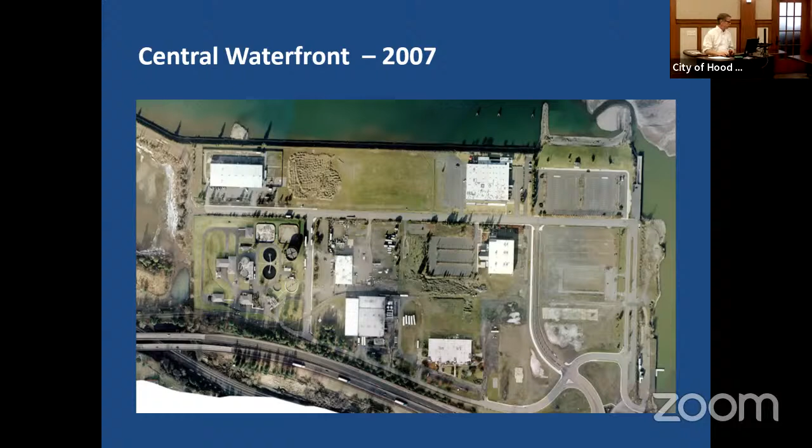This district is actually propped up as one of the most successful in the state of Oregon ever, if you look at the leverage from the amount of investment made to the amount of private capital, private equity that came into the district.

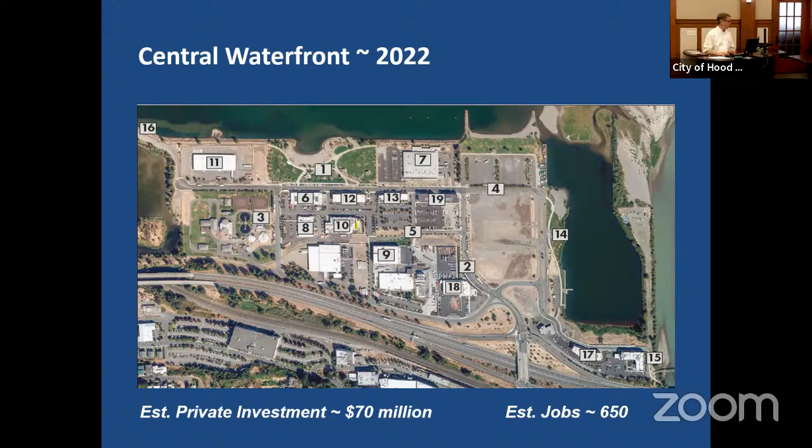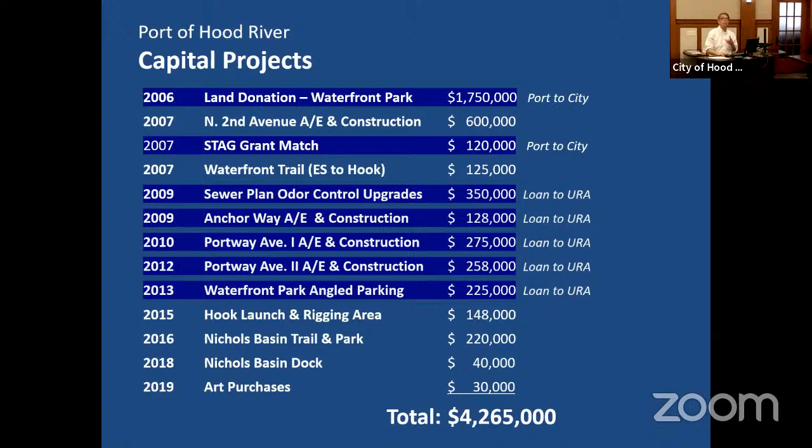It's never had to go to the capital markets. It's always been able to use existing funding and then using the tax increment generated to pay back, in this case, the port. I also included the land donation in 2006, which arguably is a big part of what you see on the waterfront.

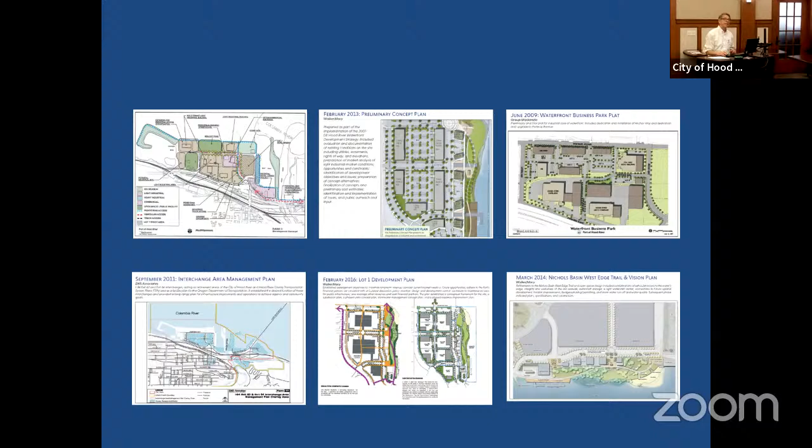There was no, urban renewal did not play a part in this project.

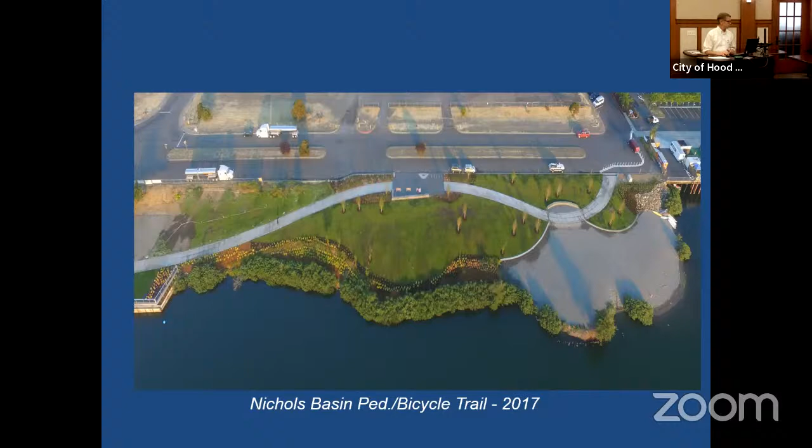And what we were trying to do here was determine more specifically, what's the infrastructure burden there? What needs to be built? Not to determine what ultimately is built there in terms of vertical construction, but in terms of what you would need in basic infrastructure no matter what. And that means streets and sidewalks, streetlights, sewer and water and electrical infrastructure. And again, it could be for anything.

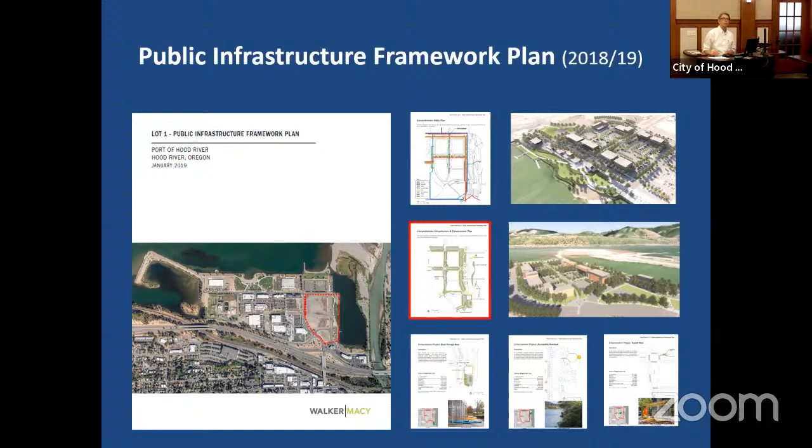So what this plan did was try to identify what those specific projects were, but it broke it up into basic projects and enhancement projects. Basic were those utilities and the basic infrastructure I mentioned.

And importantly, and I'm previewing this, but what you see here is conceptually First Street's moved over, about 80 feet further to the west. And what that does is it opens up another swath of area that at the north end is expansion of the park, and at the south end is an opportunity for some small scale, pedestrian scale sorts of commercial buildings. This concept was reflected in the waterfront refinement plan, which is now in the city's code. So the zoning code reflects this basic concept.

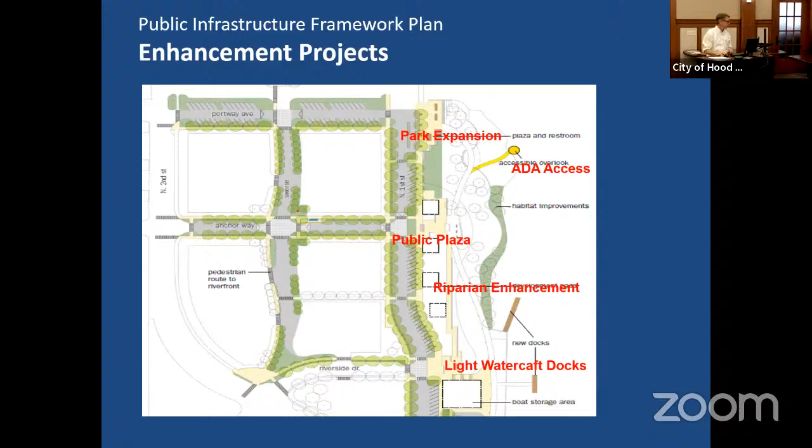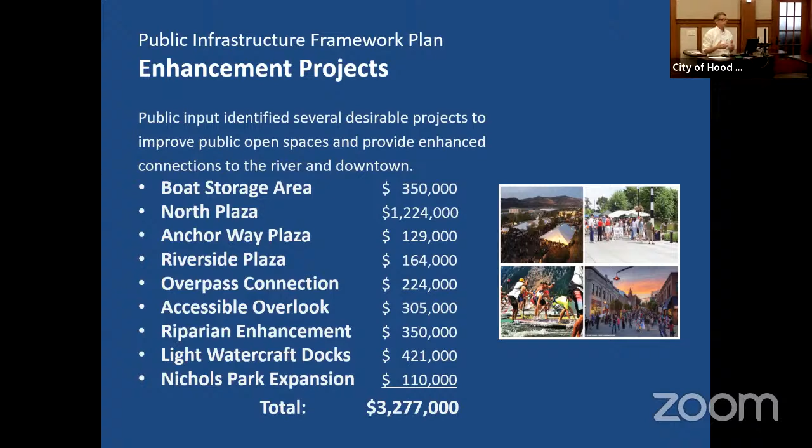So these are the enhancement projects, and this is a list of them. Again, this comes out of the framework plan, and these are based on community input and on opportunities for making that a much richer and a much more enlivened and pedestrian-focused space. So the basic projects are here.

There needs to be a second egress point for vehicular traffic coming out of the waterfront, not now, but in the future, based on traffic projections. So the East Anchor Way is a have to.

Moving First Street over is a really strong want to, because it expands the park space and adds some of those opportunities I mentioned. And then Anchor Way also serves as the potential location for a transit hub.

This is a project that CAT is really focusing on as a way to have a centralized location for transit in this community, and an interconnecting point for the Gorge Express bus and for White Salmon or Mount Adams Express, or Mount Adams Transit, a location where people can arrive and move around the community via transit.

What that does is provide that location for not only the tourist side, but also a location where people that live in other communities but work here have a centralized place to get to, and then get to their place of business.

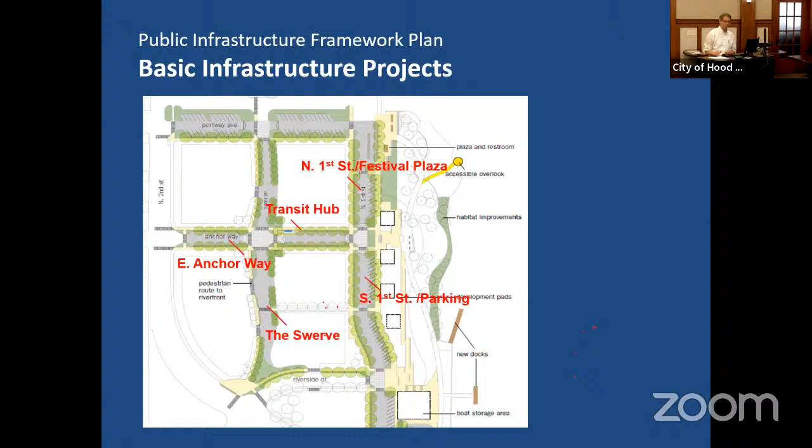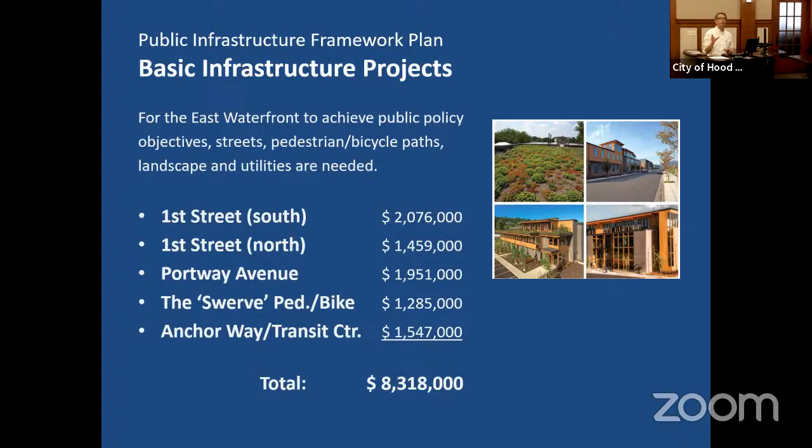So the list of basic projects is pretty short, but you can see some much higher price points. These are cost estimates that came out of the infrastructure framework plan. They had a 30% increase, and we think they're just about where they need to be right now, despite the CPI increases we're seeing. So the total burden there is $8.3 million. These roll up utilities, sewer, water, sidewalk, street trees — all of that is rolled up into these project costs.

The focus right now that we've been on for a few years is what we're calling the multimodal street. That's the East Anchor Way, it's the transit center, the public transit hub. This project, we started conceptual engineering, and then we've completed 15% engineering.

This is just an engineer's plan that shows what it would look like. In the upper right quadrant is the transit center, a pull-off for buses, a simple transit or a bus shelter in the beginning, but room for expansion.

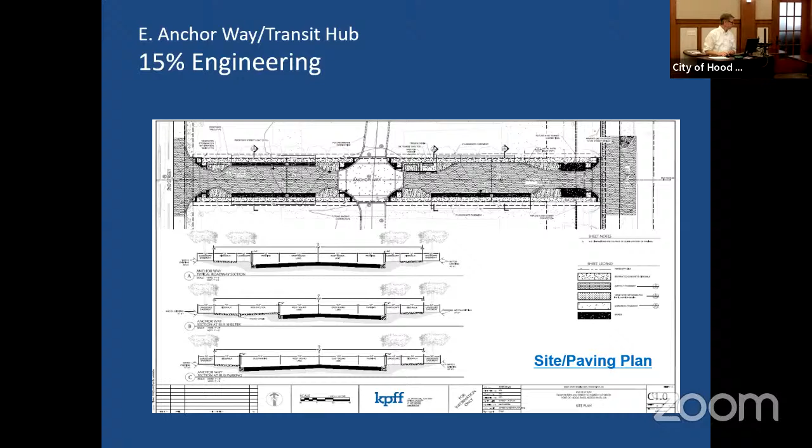You can see in the darker swaths, that's essentially part of the Green Street Network. So it collects stormwater off the street and cleanses it before it goes out into the river. And this is — I'm flipping you around now.

Now you're looking to the west, but this is the same level of engineering drawings for First Street. So we've completed that, we've updated the cost estimates, and this combination of projects, East Anchor Way and First Street, are really the core projects to establish the necessary infrastructure there.

And they can be done individually, but they're most efficiently and cost effectively done together if possible.

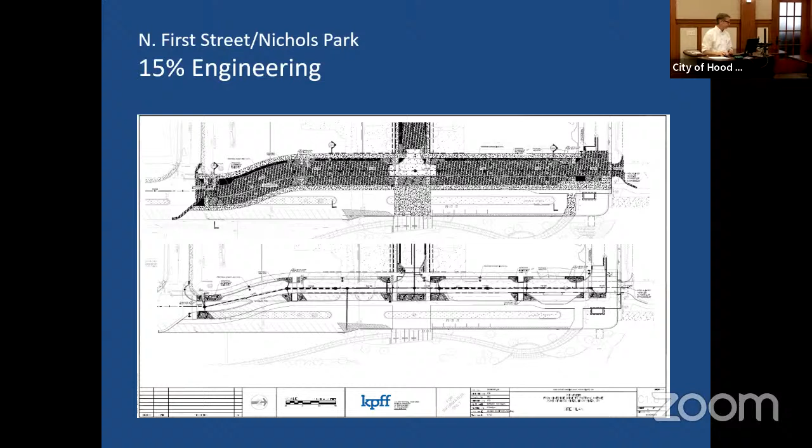So here's the current cost estimates. Anchor Way and the Transit Center is a lower cost project, 1.5 million. We've got engineering and CM on top of that. So when you add it all up, those two projects, the most important ones, are about 5.3 million.

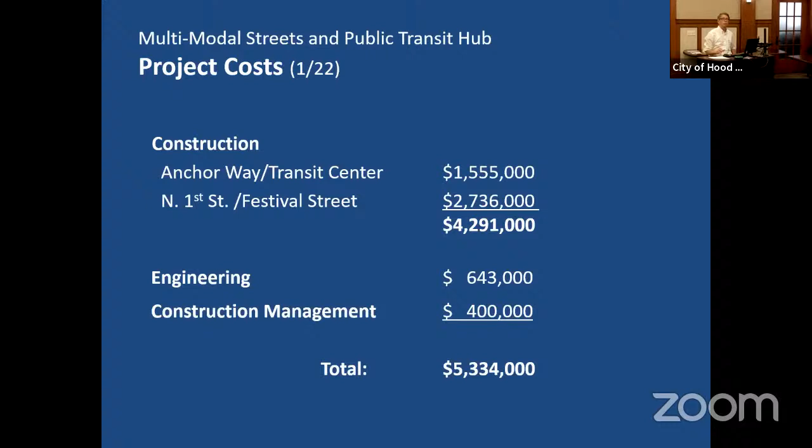Now funding — this shows where we are in the funding stack, although there's an update. So we have 2 grants in hand, $500,000 grants each. And then the port in our current budget is committed to over $1 million contribution.

Under potential, the FHWA grant is still an outstanding possibility. The CDS grant, congressionally directed spending grant, is still outstanding — in other words, we're not sure yet. And the EDA grant, the slide I showed to the Urban Renewal Board had a $1.9 million number there.

It's a very, very competitive process. We received word a week and a half ago that it was not successful, so we did not get that. So we have a delta of about $3 million to do both together, not just to do one.

So how does urban renewal enter in? This is that question about what you see as the future for the waterfront urban renewal district, if any. This is the outline of the current district — it's 109 acres, goes from the hook all the way over to the pedestrian bridge, inclusive of all those properties we've looked at, including the Nichols Basin.

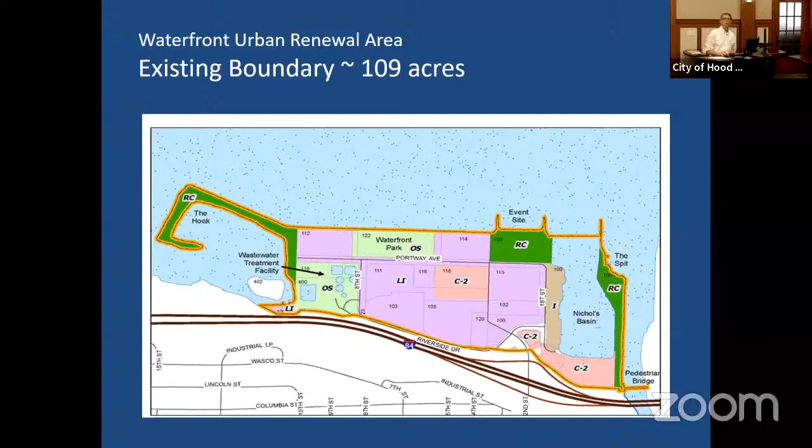I'm not going to go through this much — you've seen these before — but you have the downtown district, the waterfront, and the heights. How would you describe it? The downtown is the grandfather, the waterfront is sort of a teenager, and the heights is just getting going. So you have districts in this community of different age and duration, and different decisions for each one. For the heights, it's got a long run and a lot of important work to do.

But the fourth, additional one is the potential west side urban renewal district, and that's an important factor that the board is certainly considering, as I know you're aware of.

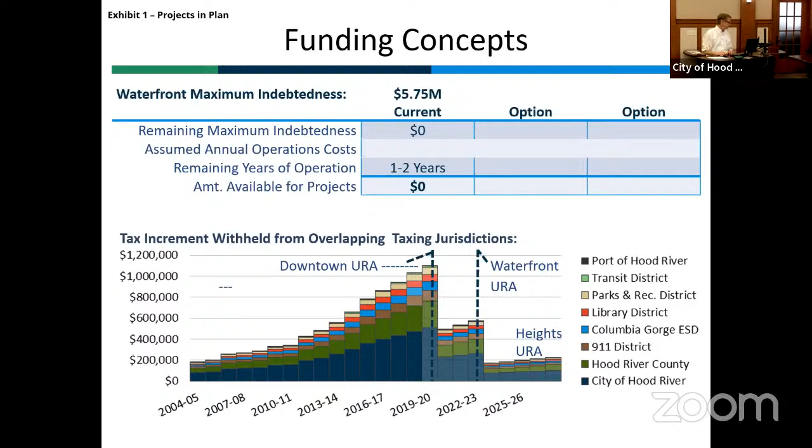So essentially what we worked with Elaine Howard, who's also the consultant for the West Side. She was also part of the team that did the original study and the original urban renewal plan and report for the waterfront, to do just a basic first level assessment. Where are we in the district? And then, conceptually, what are those options?

So here they are laid out. The district, you don't really actively terminate it. You just say there's no more TI, we can't do anything more, and it just basically times out or goes to sleep. What that does is it frees up the whole 109 acres, and that can be deployed on the West Side District or some other use determined by the council and the board.

You also can increase the maximum indebtedness. That's the key number. The MI is basically spoken for. The sewer line, the storm line was the project that the decision had to be made to deploy all the remaining funds for. But based on the existing statute, you can increase the maximum indebtedness by about $1.8 million. You can do that without, it might be a major plan amendment, but if it stays within that cap, it does not require approval by the other taxing jurisdictions. And that's an important distinction.

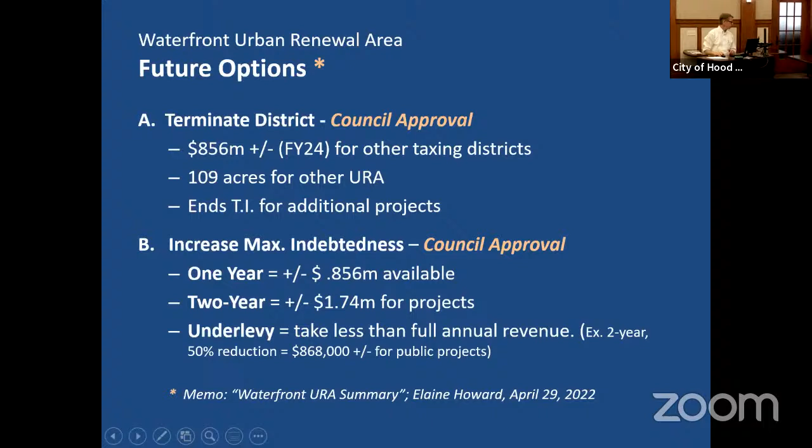But then there's other options too. You can increase the maximum indebtedness above that $1.8 million cap. That would be a major plan amendment, effectively you need to redo many of the steps that were done for the current urban renewal plan and report. But effectively, if you go above 1.8, then you have to go to your other taxing jurisdictions and make sure they're okay with it.

So the big three, of course, are the school district, the county, and the city. There's lots of other special districts like the port that have a small piece of it, but those are the big ones. And then you and the board will also need to consider options that look at reducing the size of the waterfront district.

Effectively the central area is done. There's not a whole lot more that you would need to deploy urban renewal funds or tax increment funds for. But if you look at that east end, as we talked about, there's a lot of vacant area, there's a lot of public policy objectives that could be achieved there.

And so then you get into a number of different scenarios where you could say we could reduce it by a little, we could reduce it by a lot, and all of that connects back to, we'll talk about in a minute, the financial analysis that underpins what each option is.

If you reduce the district, let's take the first option, it's 109, you take it down to 20 acres. You're returning that 89 acres, effectively all of that assessed value is being returned to the other taxing jurisdictions. And that's the way urban renewal should work. There should be a point where you say, we invested some money, a lot of private equity came in, the underlying tax base went up, and then at a certain point, that all goes back to the taxing jurisdiction.

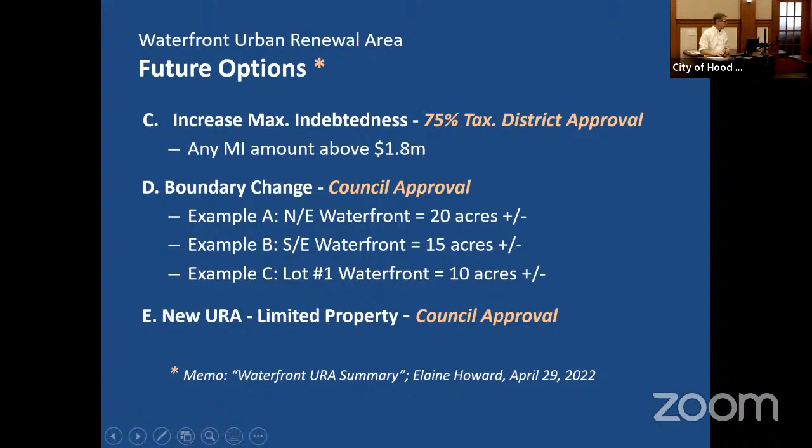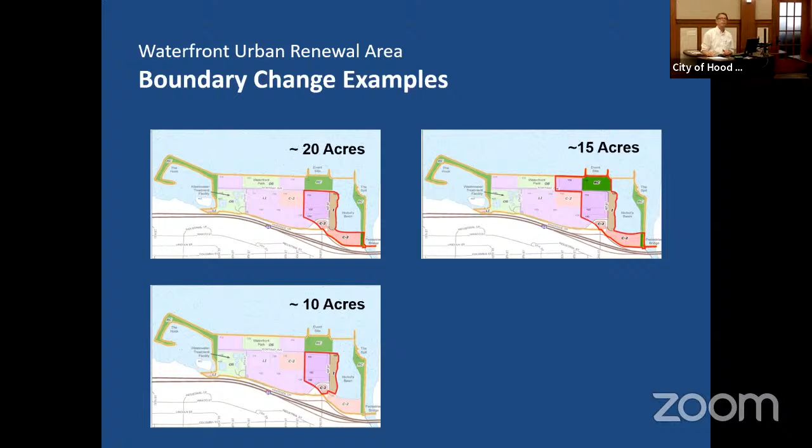So that gets us to, again, you will have your own considerations, and so will the council, but clearly the acreage for the west side is an important factor—trying to make available as much as possible to make that as big as possible. It's a factor that I've heard, of course, that return of the tax base for taxing districts.

And then, of course, importantly—I guess I'm biased—but there are still public policy objectives to be achieved on the waterfront. It's not done. If you look at lot 1 and see that big vacant area, yeah, it's good for snow storage and parking, but there's a whole lot more potential there. Likewise, access to the Nichols Basin, riparian habitat, ADA access, and all of those things. So there's a lot of other objectives that could be achieved.

And I mentioned the interchange access management plan. So this is one that I believe I used as a way to generate the discussion, but the question is, and was posed to the council and the urban renewal board, do you want to undertake further analysis of what these options are?

And what the port has committed to doing is working with the urban renewal board, defining that scope of work and paying for it to take that next step and at least analyze what the options are. So you have a more specific idea of acreage, taxation, increment generation, and what the future would be under different scenarios.

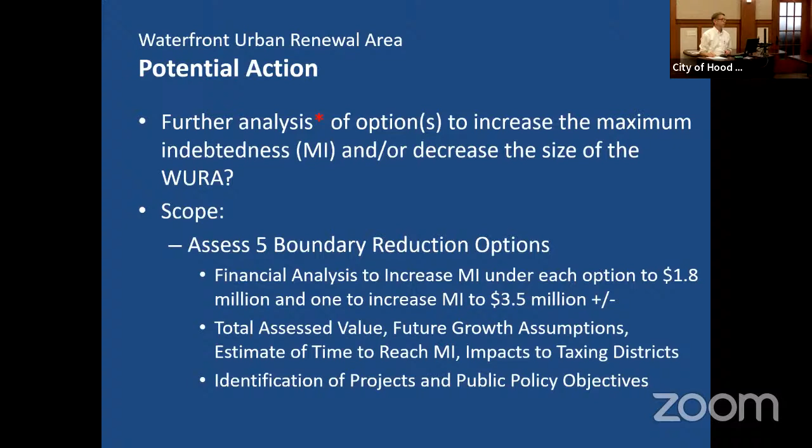I think my last one is that. So what you should have in your packet is not only the report that Elaine generated, which was the basis for much of what we talked about here, but also a scope of work of what she would do, what would be done in that next step analysis.

So I think the question is this—and answer any questions you have. It's fairly simple: 5 boundary options, financial analysis of each. Importantly, there has to be consideration of what are those important remaining projects.

Is it East Anchor Way? Is it First Street? Is it ADA access? Is it park expansion? Is it plazas? And what are the ones that are the highest priority? How much do they cost? In aggregate, how much does that mean as a target?

What other funding is there? Through that methodology, you ultimately arrive at, again, there's scenarios, but here's the role of urban renewal in those future projects. Here are the priority projects. Here's how much it would take. And that drives back through a scenario: how big's the district, how much MI can be generated, how long will it take from that?

So the scope of work was in your packet. I'm happy to answer any questions you have. This would be an iterative process. There's no cost to the urban renewal board or the agency, but it would, and at least I would suggest that it's something that would be valuable for you and the board to consider as a basis for making a decision. Let the district end, or let's go with another option.

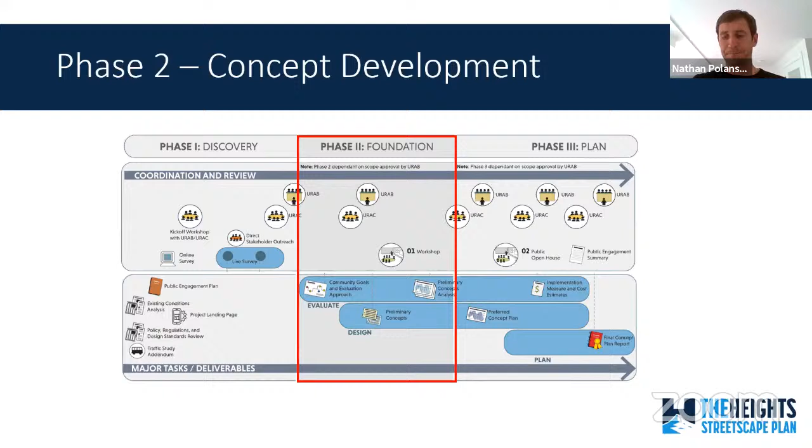Now, real quick, just reminding you guys what the design concepts were that we're talking about. Design concept 1, we looked at converting 13th from one-way traffic today to two-way traffic and adding bike facilities along 13th, which would remove parking. Concept 2 preserved the one-way traffic on 12th and 13th, but reduced the lane of traffic and really tried to create more space for walking and biking, as well as more opportunities for gathering spaces, street trees, planting, and other non-vehicular spaces.

Each of these concepts included different approaches for intersection design that were not necessarily exclusive to that concept, and they were presented as options. So those are a quick reminder and recap of the concepts that we took a look at.

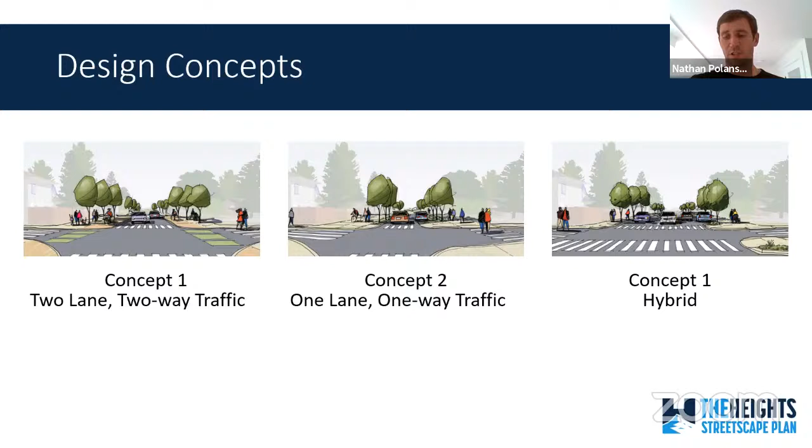From a regulatory environment, it's important to remember that both 12th and 13th today are state highway ODOT right of way. ODOT maintains the roadway from curb to curb, and the city maintains the sidewalks, the drainage infrastructure, lighting, snow removal, and things happening outside of the curb.

As we met with ODOT through this design process, one thing that became apparent is that if the traffic patterns change from that one-way circulation that happens today, and there is two-way traffic or some combination of two-way and one-way like the hybrid presented, it is likely that ODOT would not feel the need to keep both 12th and 13th as a state highway. They would focus on maintaining one of those, and the other would likely be taken over by the city. That hasn't been discussed in detail, but it had come up, and it's important to remember as part of the regulatory environment.

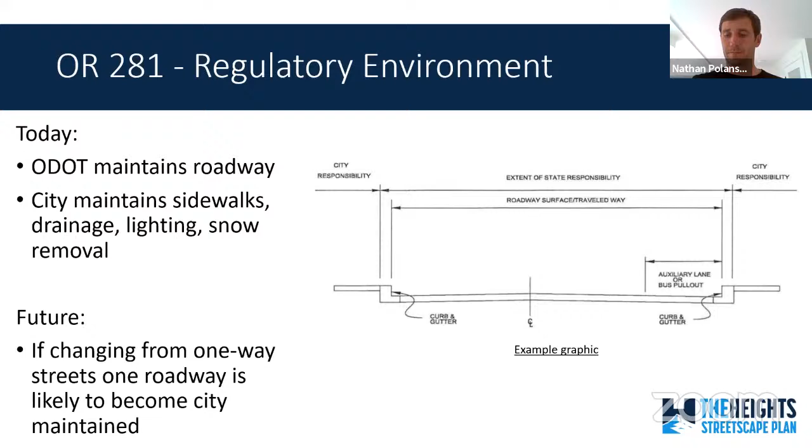So 3 or 4 months ago, we were talking about the technical evaluation. We had identified our project goals in phase 1 and identified 3 to 6 evaluation criteria to go along with each of these. The design concepts had been evaluated by the project team. All of them generally aligned well with the project goals, though design concept 1 rated more consistently in alignment with project goals.

But what's important to remember, and this came from feedback both from the advisory committee and the board, is that the evaluation criteria did not add any weighting to any of the criteria. These were all a 1-for-1 evaluation.

As we went through that, our design team really tried to dig into some of the differences in the scoring, looking at them across both concepts, looking at them across individual streets within a concept, to identify what some of the key differences were identified during that technical evaluation.

So, what level of congestion can be tolerated? We've talked about how all of these concepts will reduce the level of vehicular service that's going to be provided in the future and try to provide a more balanced environment for people walking, biking, and driving.

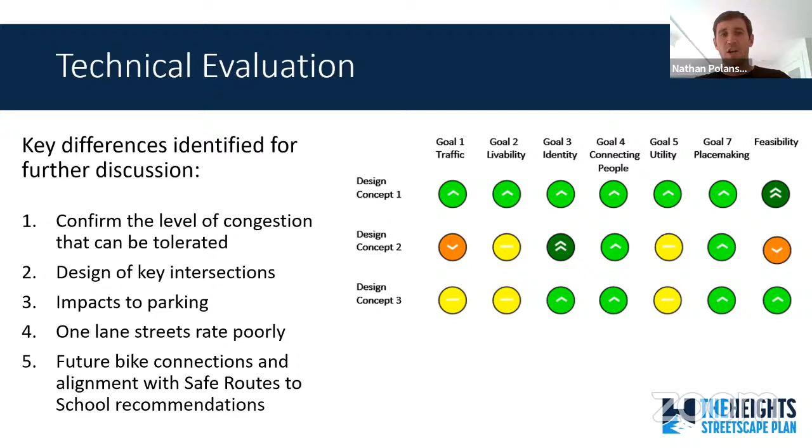The one-lane streets really didn't function very well from a traffic analysis standpoint. And then really thinking about those future bike connections, looking east and west on May Street to the schools and also to the south, beyond our project study area, and how those align with safe routes to school recommendations. So those are some of the key things we had identified coming out of our technical analysis.

Looking at a couple of key traffic items, that congestion in design concept 1, two-way, 2-lane traffic rated the best out of the 3 concepts. Design concept 2 with 1 lane in each way really rated poorly. And design concept 3 was somewhere in the middle.

In design concept 2 with 1 lane of traffic, the circulation doesn't change, but a lot of the traffic is shifting to 13th. That sort of weighs down or brings down the traffic level of service and increases the congestion on 13th.

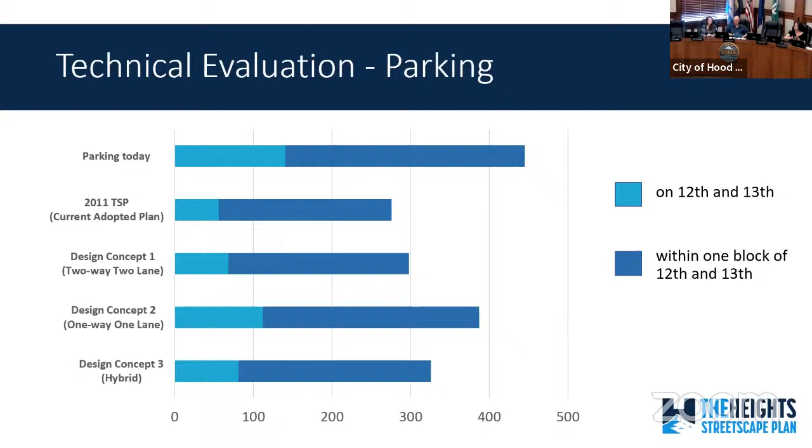I have a quick question. Does the within-1-block count include it if we change the parking on the side streets between 12th and 13th, or is that not included? Yes, that includes the spots in between.

As part of that, I'd call it a parking study light. Our team, DKS, as the traffic engineer, went out and did an audit of the existing on-street parking stalls. So we had a count of all the stalls on 12th and 13th, in between 12th and 13th, and within about a block to the east and west of 12th and 13th. This total count includes those.

But the plan is to change, or we've talked about changing, to angled parking between 12th and 13th. Correct, this includes that assumption - it assumes all of those are in the same condition as existing.

So there could be an opportunity as we start to dive into developing a preferred design - how can we squeeze more parking out of those blocks in between? There's more potential for the dark blue to be bigger on all those than it is currently. I think there could be. When we get into actually laying out parking stalls, it's a narrow right of way - there's an alley in between, there are some driveways. So it's always a bit of a balance of how we can best use that space to generate the most parking. That's what we've heard as a goal, recognizing that all of these design concepts reduce parking from today.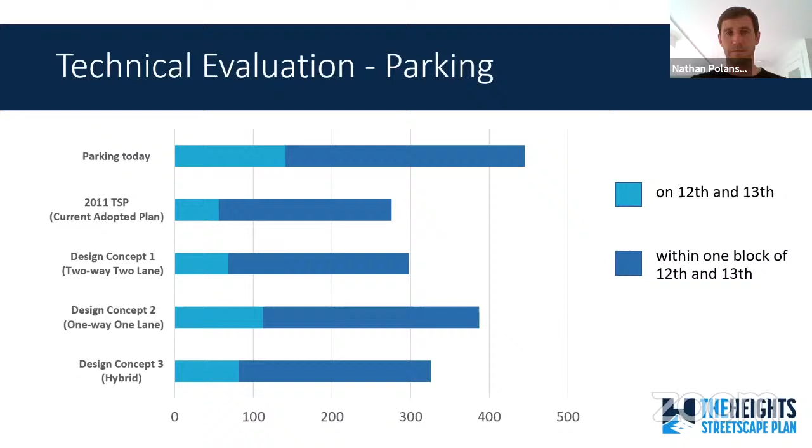One of the other items we did in addition to the technical analysis is reaching out to the emergency responders for feedback on the preliminary design concepts. These were meetings held just in advance of the public open house. We spoke with the Hood River County Sheriff, the city fire department, the city police department, and we also reached out to West Side Fire, but they did not participate.

Some of the key takeaways from our perspective: the one-way streets on 12th and 13th really are not desirable for emergency access. If this was a local or neighborhood street, that might work okay, but recognizing the broader, regional area that 12th and 13th serve, that was identified as pretty undesirable.

We fielded several questions about the raised bike lanes in each of the concepts, and when those were located next to the roadway, whether there are ways we can design those, potentially making them mountable during emergency access for fire or police, so they have a little more space to work with as they're responding.

The traffic signal at 13th and May—we've talked about this a lot throughout the process and heard early on that there are concerns with the signal stopping vehicles and the challenge with trucks getting stuck on the hill. This was reiterated by the emergency services officials. The fire department also raised questions related to the angle parking on 12th and the hybrid design concept 3, and how fire access would be provided.

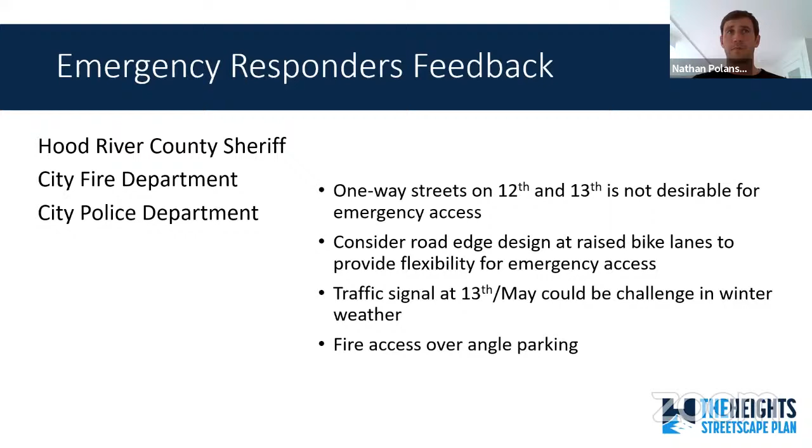So that was a quick recap of the high points from the technical evaluation. We spent a lot of time the last three months planning for, preparing for, and executing a public engagement program.

City staff did a phenomenal job with the social media outreach. Dustin spent an afternoon or two walking out, knocking door to door, making sure to the extent we could that we alerted all the business owners and property owners about the open house, and made sure they were there, providing flyers.

On the website, we got a handful of comments, but as Dustin mentioned earlier, this was a very comprehensive and good team effort to really get the community turnout, and I think that's reflected in the participation we had.

As Dustin mentioned, thank you all for contributing to getting food and drinks there, the organizing, the setup, and walking people through the two days of open house. We had probably close to 300 people come through, and we had interpreters on hand for the full duration of the two days for Spanish speaking participants.

On the online survey, we also got a lot of feedback—over 1,000 people at least opened the survey link and responded to one of the questions, and over 300 people went through the entire survey. If you recall, during phase 1 of the project, when we were getting feedback on issues, opportunities, and identifying goals, we posted the survey in English and Spanish but had no complete responses from the Spanish language survey. So it was great that this time 21 people fully completed the survey in Spanish.

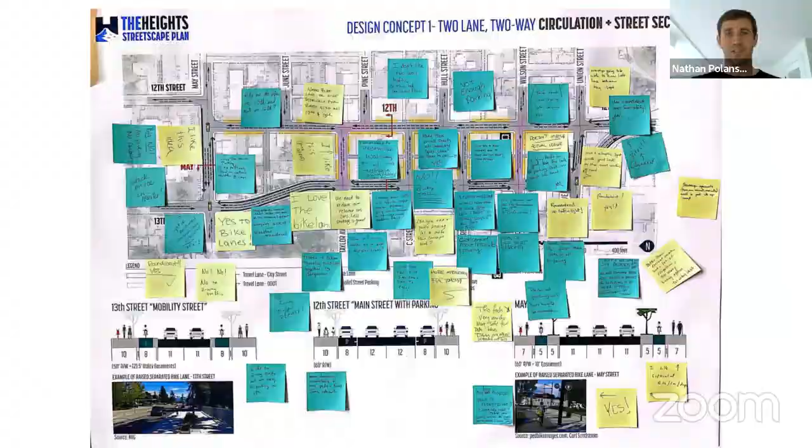Some of the key things that we took away, mostly from the written comments rather than the in-person conversations, there did seem to be a preference for a roundabout over a traffic light at 13th and May.

At the other end of the corridor, there was a lot of concern from some residents and business owners about the property impacts and business impacts at the Belmont intersection. Parking continued to be a hot topic.

People didn't seem too excited about the idea of going back to two-way traffic, and there were some questions related to, well, it used to be two-way and it got changed. Why would we go back?

Winter weather conditions were brought up in terms of the intersection at 13th and May that we talked about, and also, how frequently are people going to be using bike lanes during the winter?

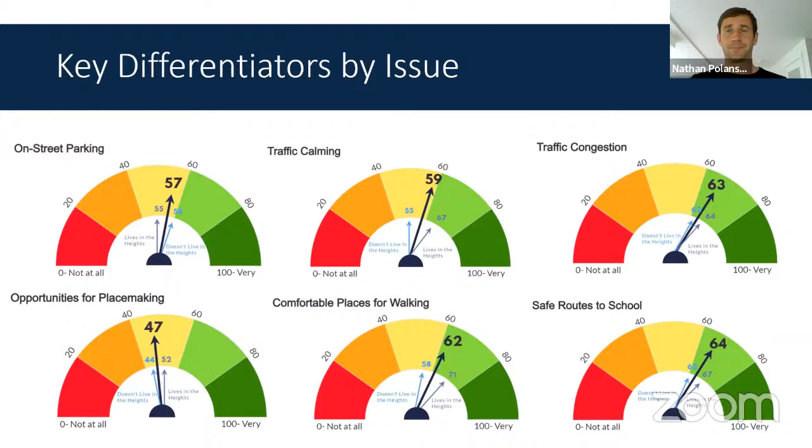One of the other things that was not related to the public engagement, but was talking about roundabouts: the city was able to hire a third-party roundabout specialist to take a look at the two layouts that have been developed as part of the design concepts, and based on the outcomes of the traffic analysis, really build those out to more accurately reflect the footprint that would be required.

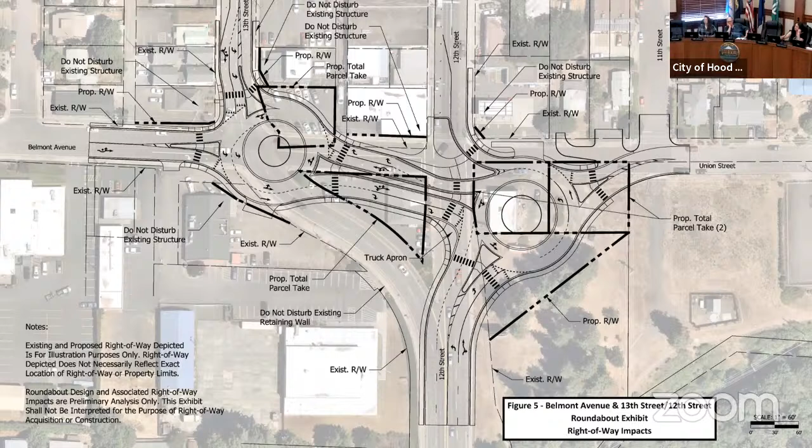Can I ask another question? The dark black lines on this one and the other one—where it goes into the park, because that's an easy thing to see—so that's not where the road goes, correct? So what does that mean for that area between the road and that land in the park? Does it get destroyed?

My guess—and I don't know if Dustin has had more conversations with the third party reviewer—is that these concepts don't take into consideration topography, which has the potential to require more grading and retaining walls. But I'd imagine this additional setback along the park is probably allowing for a transition of grading down, recognizing that it's city property. So some of the vegetation along there is impacted, but I don't think that means this is not usable park space or open space.

And then, obviously there's a lot where it's private property or whatever, but it doesn't necessarily cut into the building, so yeah, I'm just confused about that.

When you construct an intersection or any road project, we look not only at the final outcome but constructability. Nathan mentioned topography having potential impacts, but we also need some level real estate available to queue equipment to actually construct the project. So when it comes to proposed right-of-way, it anticipates that—probably some maintenance space, not just maintaining right to the curb, but the ability to go outside of that. On the north side, in this instance, it also contemplates maybe future changes to add or reduce a curb improvement. So it really captures not only the project, but feasibility pieces—constructability, maintenance, and in this 3D world of Hood River we live in, grade changes that can impact that as well.

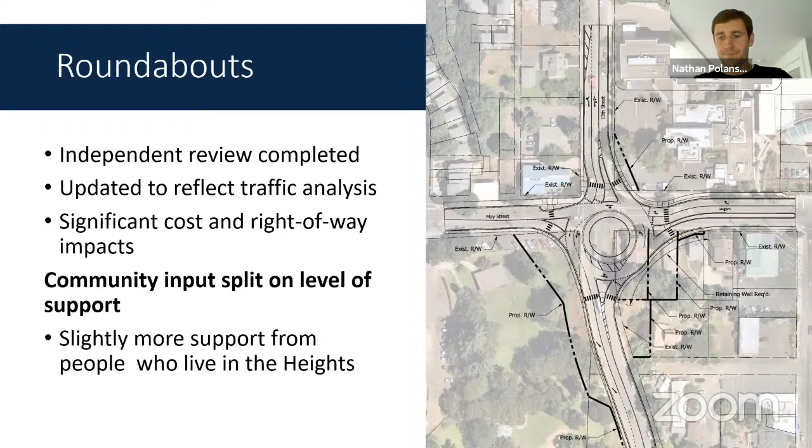Any other quick questions on the roundabouts while we're here?

Taking all of that feedback, sifting through the technical analysis, really thinking about how the design concepts align with the project goals, going back to the original technical evaluation based on the things we heard from the community at the open house, read from Post-it notes, and the feedback we got from the online survey, breaking it down by people that live in the Heights versus those that don't, really getting into all of that detail.

We feel there's a base foundation that starts with Concept 3 to move forward to preliminary design. One of the challenges with finding a perfect solution is there's so much mixed views on what's needed, and Concept 3, the hybrid, tries to balance that by providing more of a local community street with angle parking on 12th and a two-way bike lane, deprioritizing people walking along 13th to some extent, while also accommodating vehicular needs.

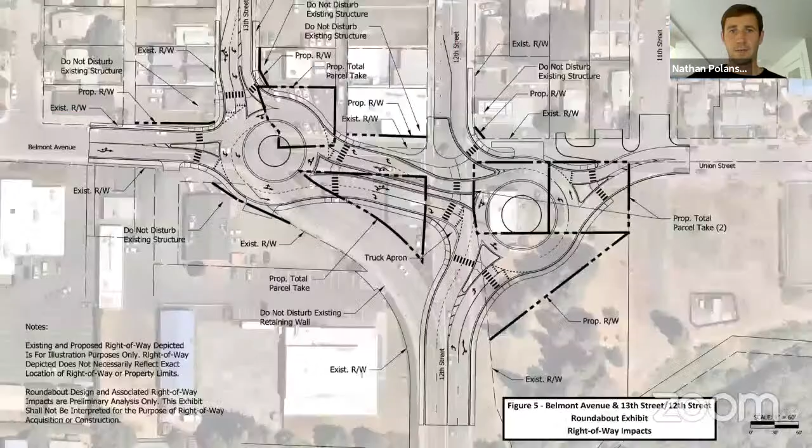Going back to the traffic calming slide, let me flip back up real quickly. 13th did not rate as well for traffic calming on design concept 3, and it really speaks to the three-lane cross section.

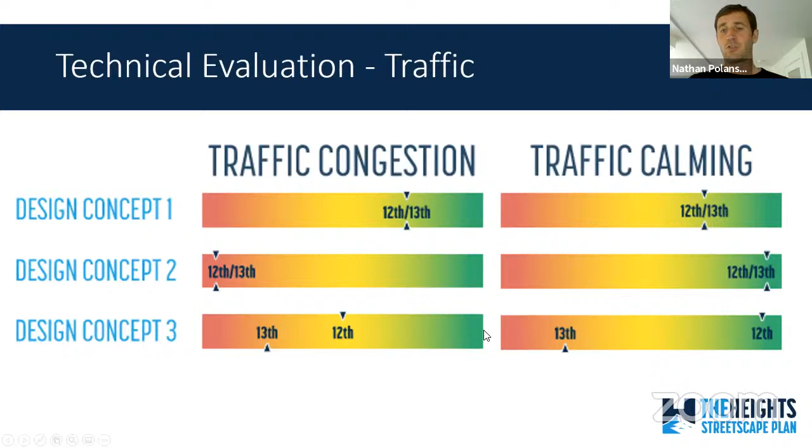Flipping back down as we're talking about recommendations, an important part of developing a preferred design for 13th is focusing on ways we can improve the walking environment for people traveling along 13th, looking at tools like reducing turn spaces and incorporating medians where we can. How can we have a consistent buffer between the sidewalk and the travel lane on the east side of the street where there's no parking right next to the curb? In the future, if this recommendation moves forward, cars would be right next to the sidewalk, so how can we create that buffer?

We're really working with emergency access providers and thinking with the bike community about how the design for bike lanes can help balance the needs for access during emergency responses. We're also looking to build on bike connections outside the project area, to the south and to Indian Creek Trail, and depending on the intersection designs selected, how we can design for the most comfortable experience for people walking and biking through key intersections.

Incorporating placemaking and gathering spaces, how can we plan for community events, whether on side streets or along 12th, and where are the places we can create a variety of scales and opportunities to engage with neighbors and community members.

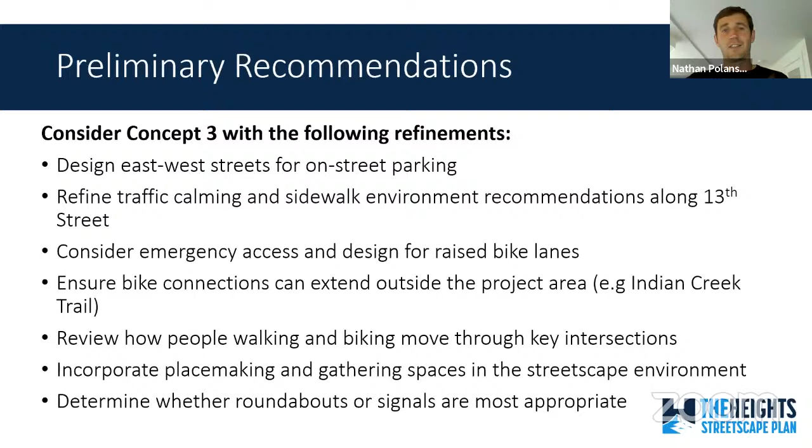So that's the presentation we had prepared. As Dustin mentioned, we're looking to identify issues to raise to the agency board and/or recommendations from the advisory committee.

I think the thought of building on a framework that starts with Concept 3, the hybrid, is something that would be supported by the advisory committee. Thoughts on intersection treatments, design refinements that should be included with a recommendation for moving forward with the design concept, those are some of the things I'm looking forward to getting your thoughts on.

So with that, I'm going to stop sharing and open it up for discussion. Dustin, if there's anything you want to add or feel needs more explanation, I'm happy to try to provide it.

Mr. Chair? Got anything? No, we're here for you. We tried to walk through that, the short version of 350 pages and 4 months of work.

I think that last slide really takes into account, based on what you've seen, what does the Urban Renewal Agency Board need to consider when trying to take this on? Thanks Nathan for starting with the process calendar page. This is really the big 3-phase project. This is not the end of the project. It is really starting to look at the foundation to build the final design from.